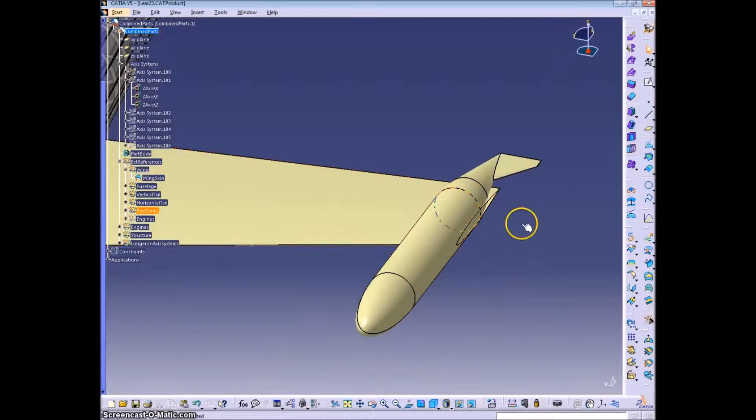First, we're going to clean up the tip of this wing, getting rid of everything that's hanging or intersecting with the fuel tank.

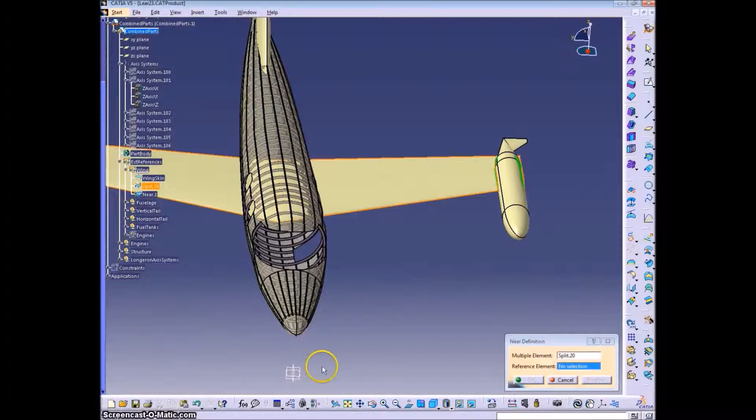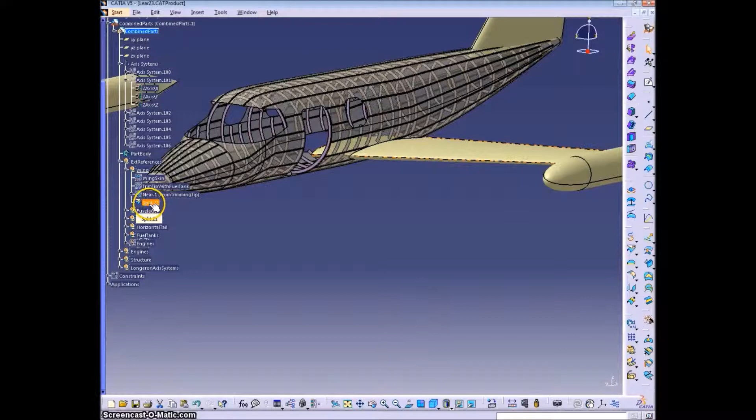I'm going to cut it on the ZX plane. This way, you only have to do this procedure once, and then everything can be reflected over to the port side or the starboard side.

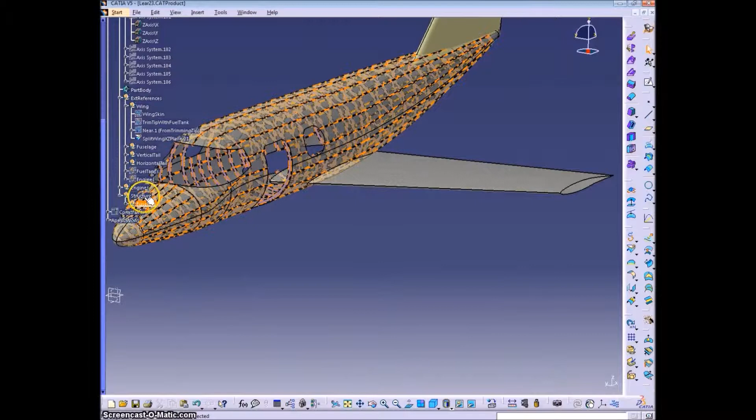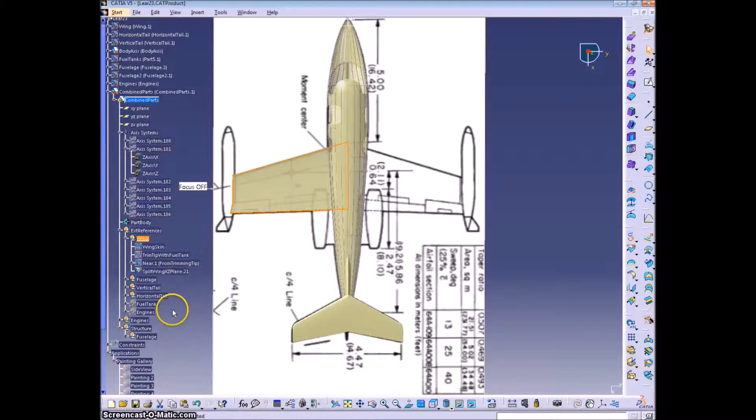Now, to create the control surfaces, we need to sketch them based off of the drawing, and then we'll extrude our sketches, cut the wing with the extrusions, keeping both sides, and then we'll fill in the rest of the pieces from there.

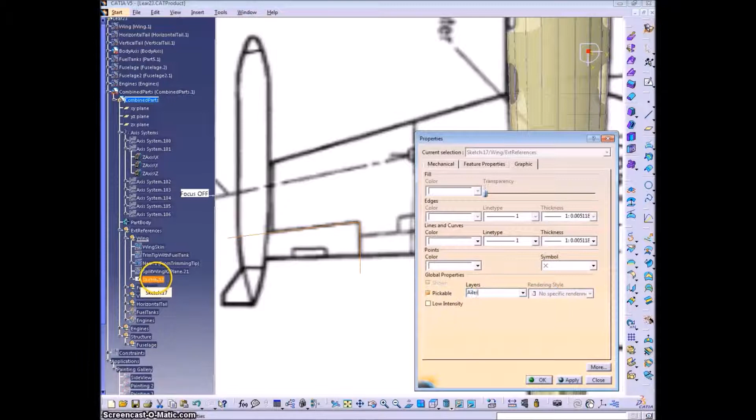So we'll start with the ailerons. Hide the wing for now, and we'll leave just that extra piece hanging off the edge of the wing. Doesn't matter, we're going to cut it, as long as everything touches where it needs to touch. That's all that matters.

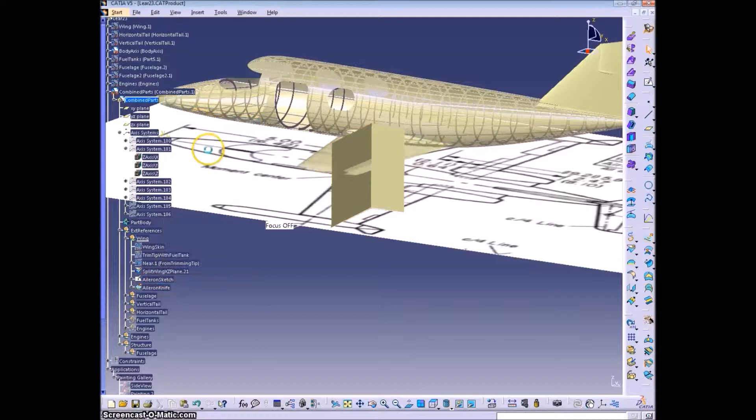And now splitting the wing, keeping both sides, okay. Now we have this aileron piece.

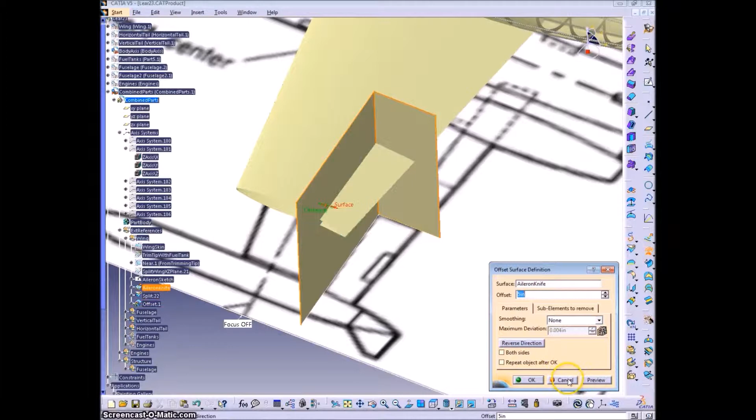But we want to create a gap between the surfaces. So instead of that being the aileron, I'm going to offset the knife. I have a large gap just to see if it's going in the correct direction. We'll change that to a smaller, maybe 1/8 of an inch or a 1/4 inch gap.

And now we will call it the outer sketch, and the inner sketch, or knife.

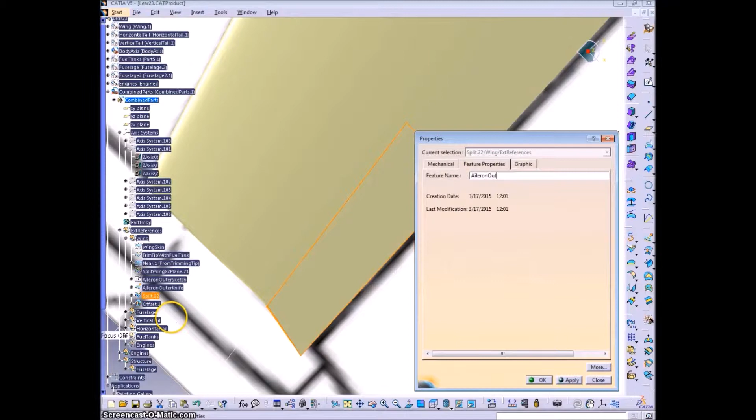And then we will cut the aileron with the inner part, not keeping both sides this time. We're going to get rid of the piece in the middle so that way we see a gap when we look at this, even when it's all the same material. Similar to what we did with the cutout, the door cutout, but we're not going to put in a seal this time.

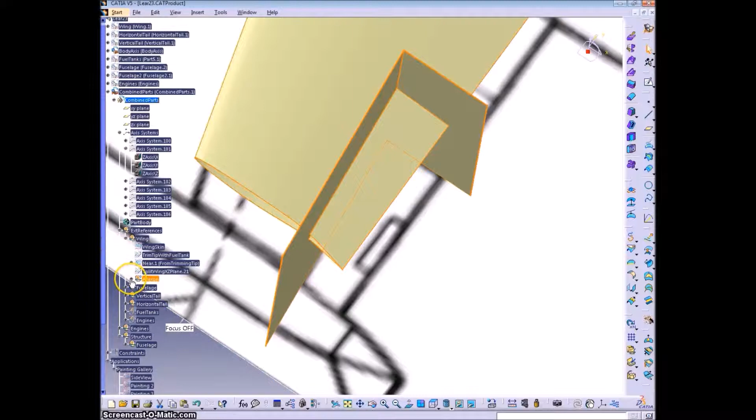So you can see a slight gap there.

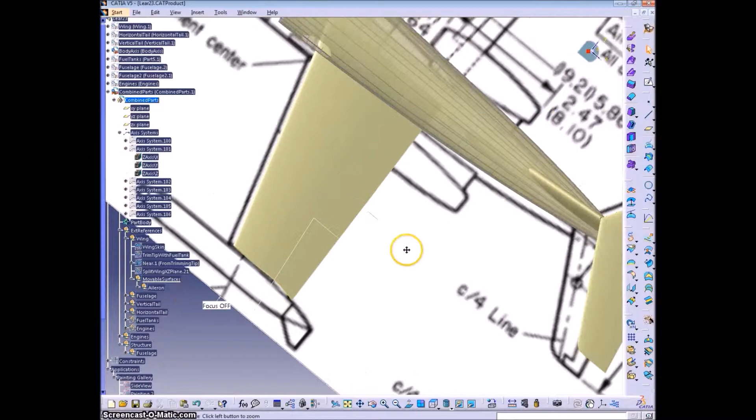Continuing from there, again we'll enter a sketch on the XY plane. This time we're going to do the flaps.

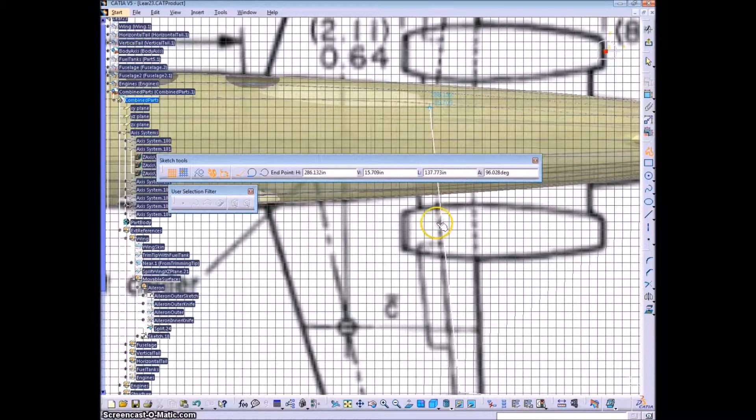And that line along the aileron there, that's coincident with the aileron line. Make these parallel to each other, and then set that line along the drawing.

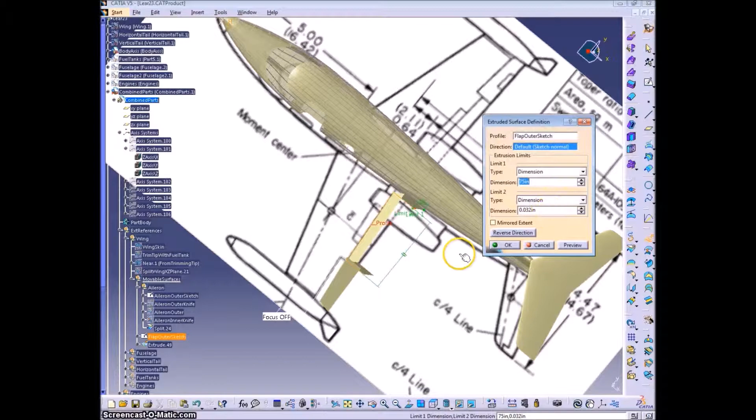And again, another extrusion. We don't really need the part that's running along the aileron there. Probably better not to have it, so get rid of it.

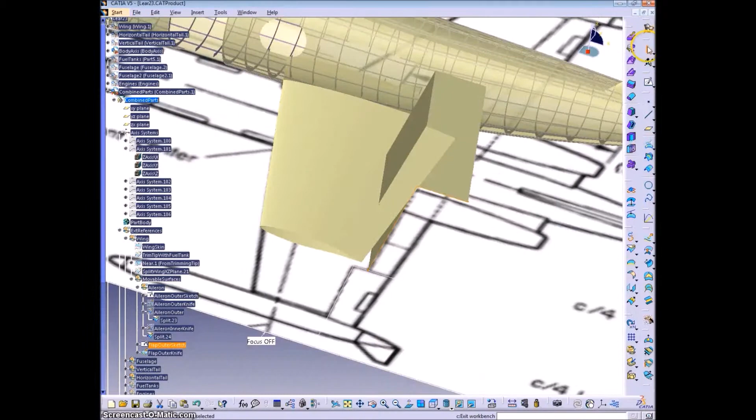And just give us a little extra there to work with. Now we have our flap.

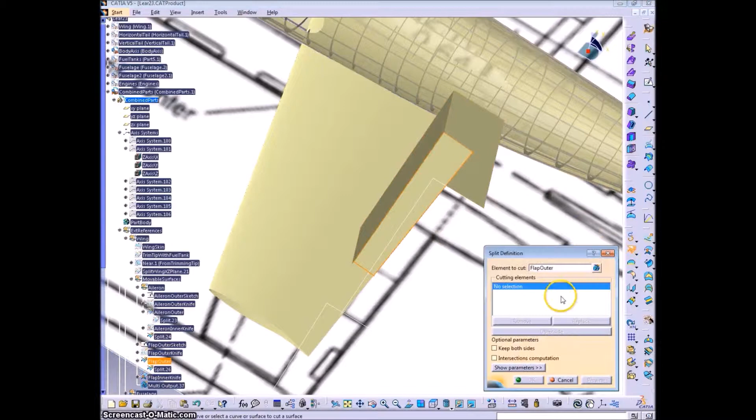We'll make, again, another offset surface to create the gap, similar to what we did with the aileron. You can see the gap there.

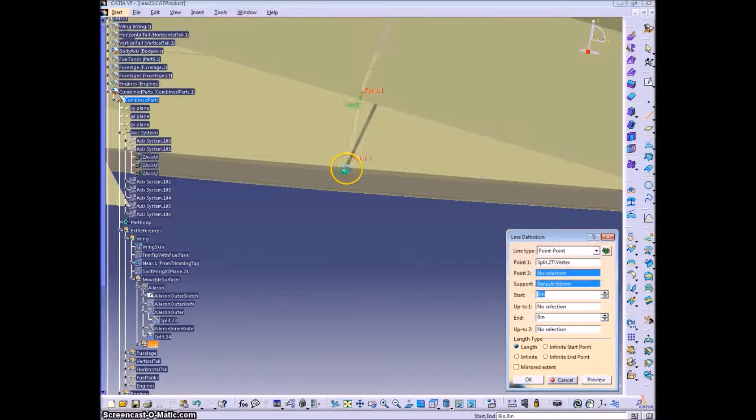Now I'm going to fill in all the edges here. There are at least two ways you can go about this. You can do the way that I'm showing here, where I'm closing off each face.

And then making a fill. I was just showing there by clicking all the surfaces that you have to do them one at a time.

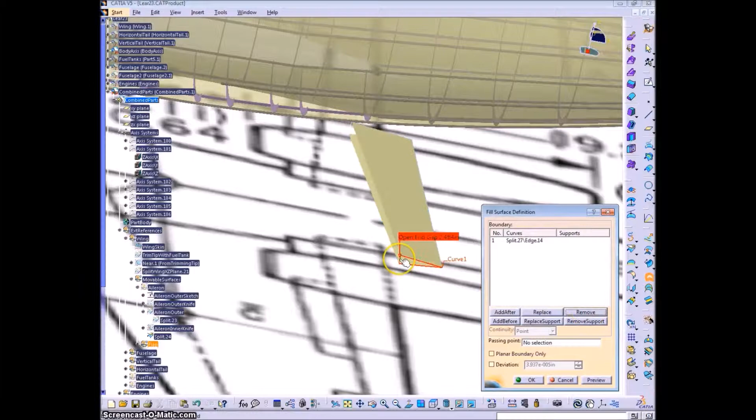Your other option is to cut the knives that we created, which are the extrusions, with this flat piece and just keep the inside portion. That'll give you two of the sides.

You would still have to fill in the third side where you didn't have a face to the knife. For example, between the aileron and the flap, there was nothing there. Well, I guess there, yeah.

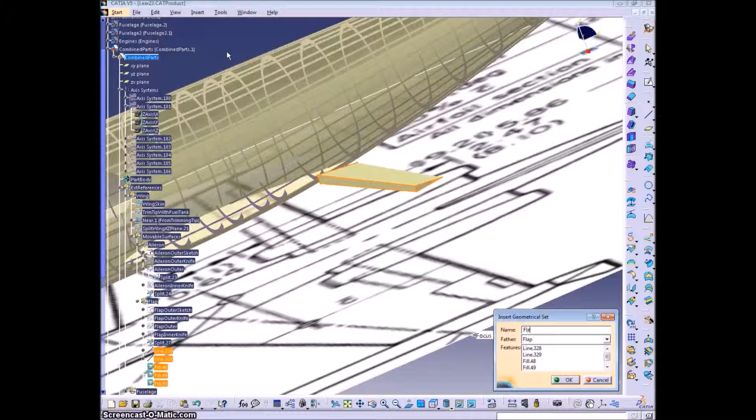And we'll do the same thing with the flap as the aileron, just adding some lines to close out each face.

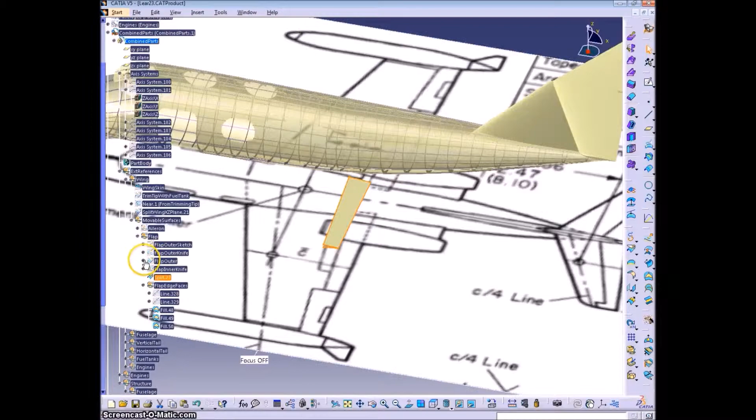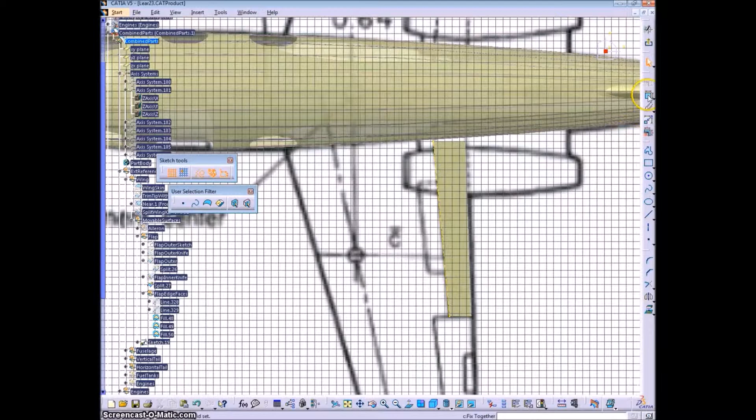Now I'm going to add the spoiler. We're going to use that front piece of the flap there as a construction object, projecting into this plane, and then we'll cut, using this to cut our new sketch here.

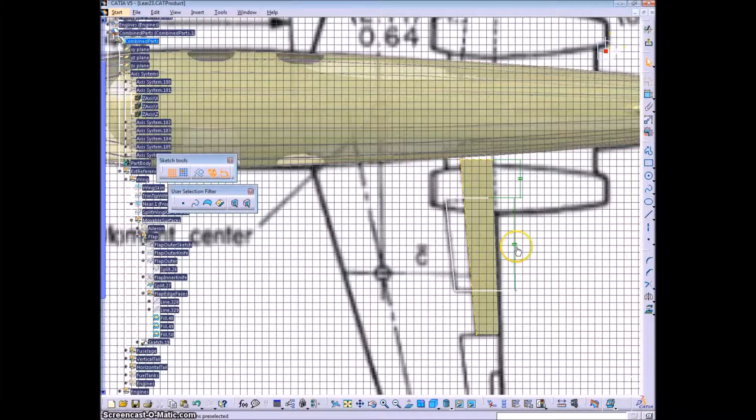Looks suitable. Name it spoiler sketch.

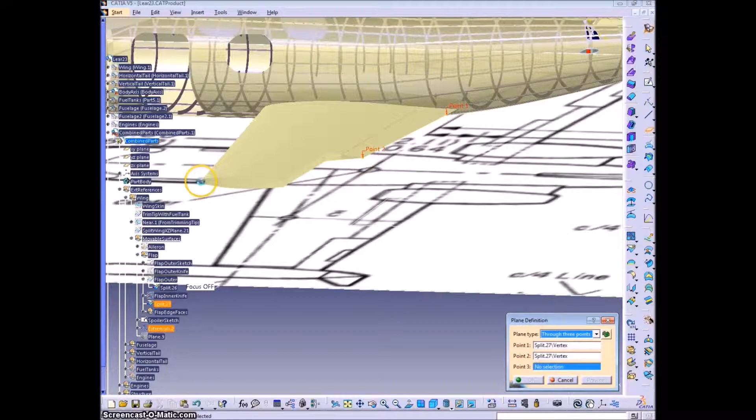Now I'm creating a point here so we can create a plane on which to project that sketch, because we only want to intersect the top surface of the wing when we split it. The spoiler doesn't go all the way through the wing.

So you can slow down the video and watch those steps closer if you need to.

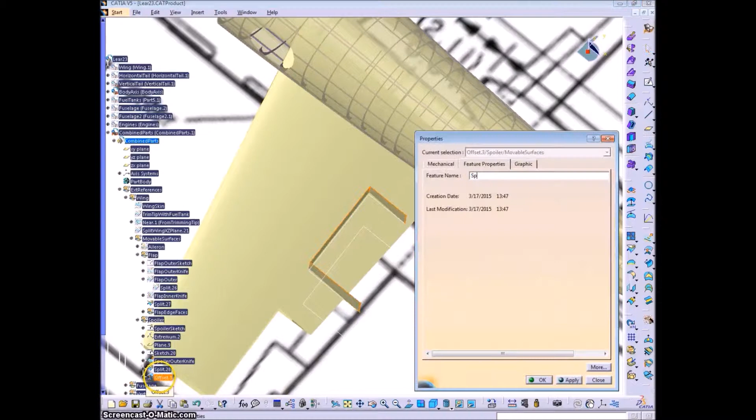You could also project or put the sketch on a plane above the wing and then project the sketch instead of using extrusion down onto the wing, and only use the first element. There's a checkbox where you could select just keep the first surface on which you project. That would just give you the top surface of the wing. But here, it's another way to go about it.

Your plane doesn't need to be exactly in the middle, it just needs to be above the bottom surface for where the spoiler is. And now we just have that panel there floating.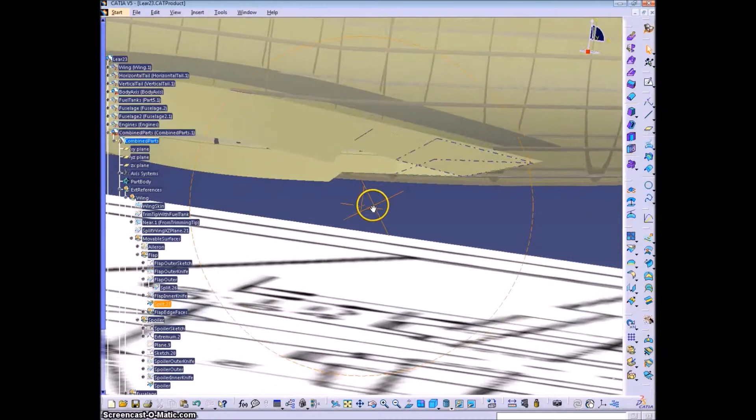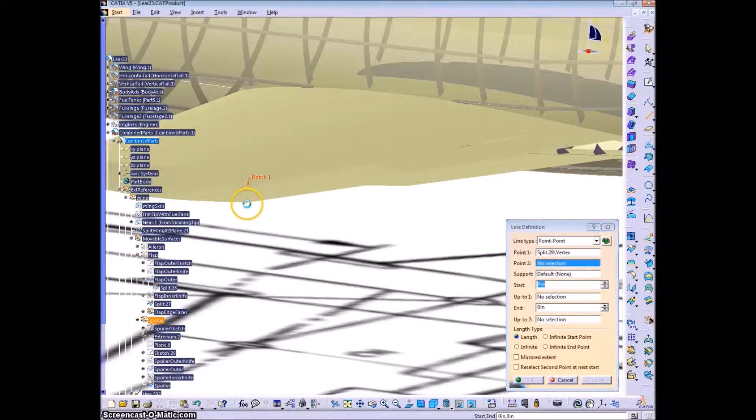We went through the same procedure with the gaps. And now I'll fill in the faces to the wing, closing edges.

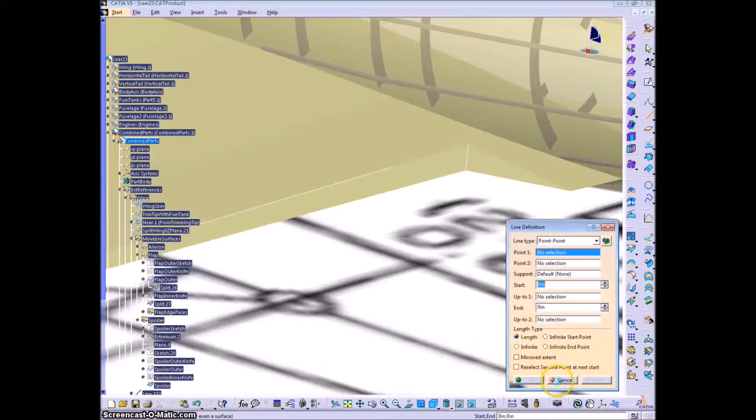And we're just going to close off that whole back side, and go and use a fill on each of these sections.

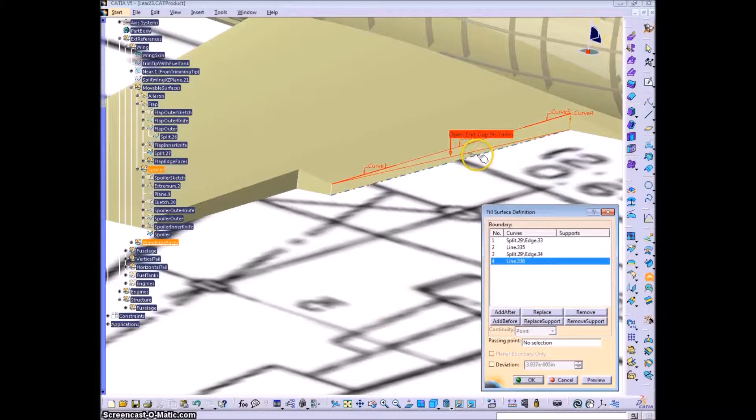Don't have to fill in the outboard edge of the wing because the fuel tank is there.

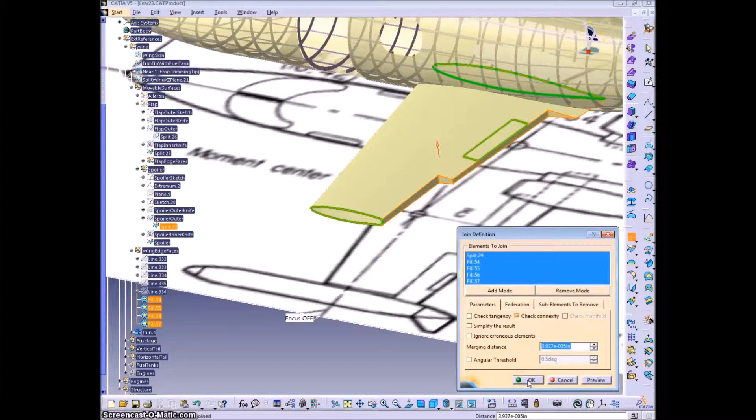And the same thing can be done with the flaps and the ailerons. You join all the edges of the aileron as one part, you join all the edges of the flap as one part, like I'm showing here.

And then once you're done with all that, you can just use the symmetry tool to reflect everything over to the starboard side. That is how we create all the movable surfaces for the wing. You can follow the same procedure to create the elevator and the rudder.